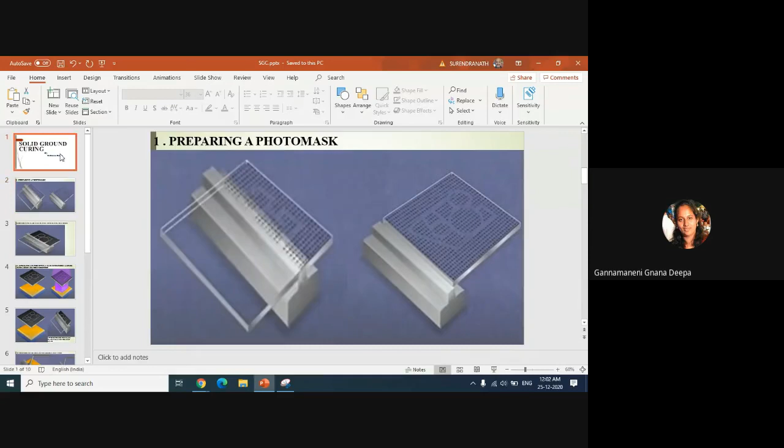Today I am here to teach you solid ground curing. It is one of the additive manufacturing processes. This is a liquid based additive manufacturing process. It is also a rapid prototyping technology. As we know, additive manufacturing has other names, called freeform fabrication and rapid prototyping. If we talk about the technology we are using in additive manufacturing, it is 3D printing technology. So these are the names.

So now we are discussing solid ground curing. It is a photopolymerization based additive technology. This is one of the processes in liquid based additive manufacturing systems, which was in our first unit. In this technology, we have only two printers available: Solider 4600 and Solider 5600. These two printers are the only printers available under SGC.

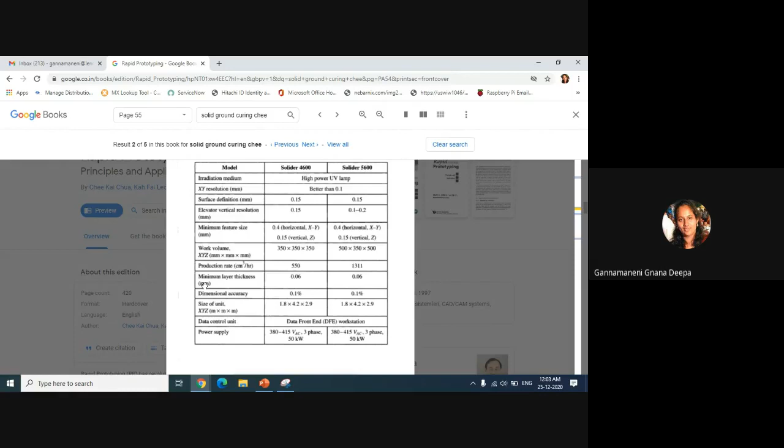This technology was introduced by Cubital Incorporated Limited, Israel. This process was introduced in 1987, and it is a photopolymerization based technology. So, what is solid ground curing? Solid ground curing consists of a print bed and a platform, an ultraviolet lamp for curing, a liquid photopolymerizable resin, and a wax material that acts as a support material.

As we know, in layering technology, a CAD design is created, and that CAD design is saved in a .stl file format, standard tessellation language, and that .stl file is imported into slicing software. This slicing software slices the 3D model into 2D patterns. The slicing software communicates with the 3D printer, and the first sliced 2D pattern is printed.

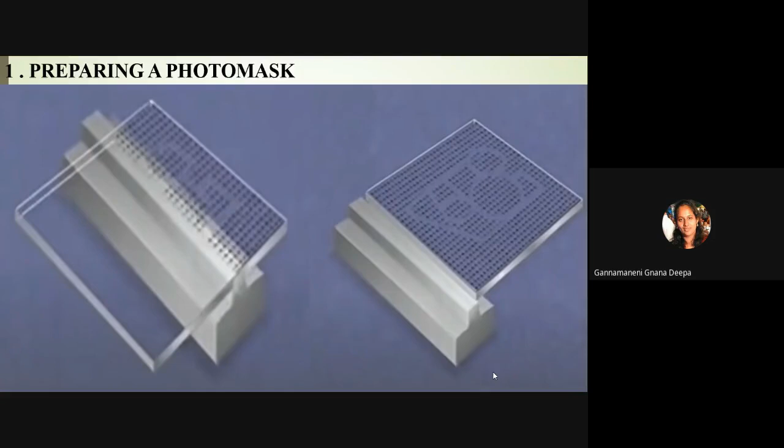This glass plate is passed under the toner. This toner equally distributes the dots, uncovering the contoured area. Here we can see the contoured area. That contoured area itself is our 2D pattern that is sliced in the slicing software. This is how the photo mask is prepared.

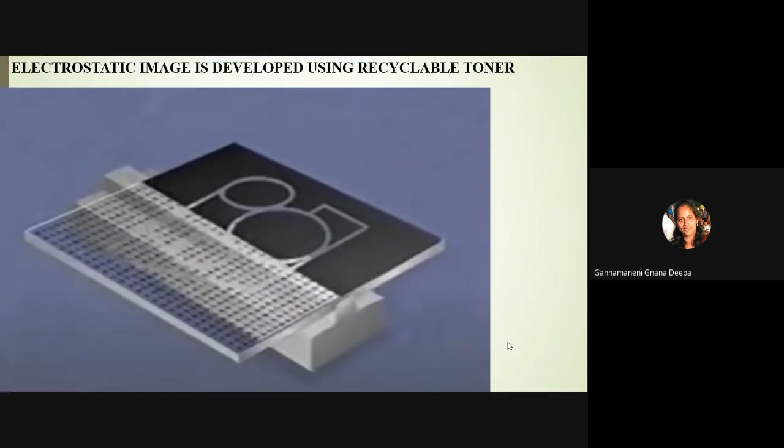Because opaque material is equally covered over there and the contour shape is clear and transparent, the UV rays pass through the contoured area towards the resin only. Everything beyond that contoured area will remain as liquid resin. When the UV light comes in contact with the liquid resin through the contoured area, only that area will get solidified. The entire remaining masked area will remain as a liquid.

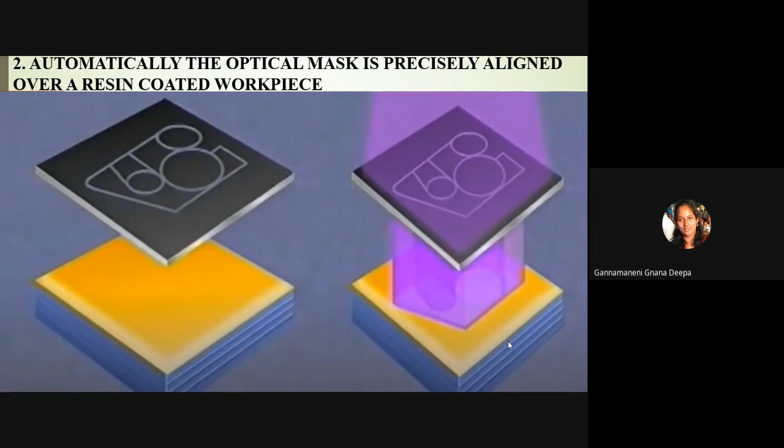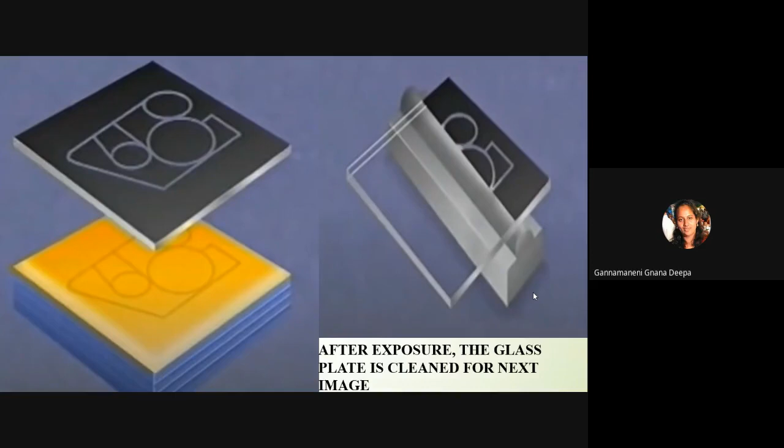Before going to the next step, after the exposure, the glass plate is cleaned for the next image. Here in the slide, we can see that process. For the next process, the workpiece moves beneath the aerodynamic wiper, which we call the vacuumification process. The workpiece with the unsolidified and solidified resin moves under the aerodynamic wiper.

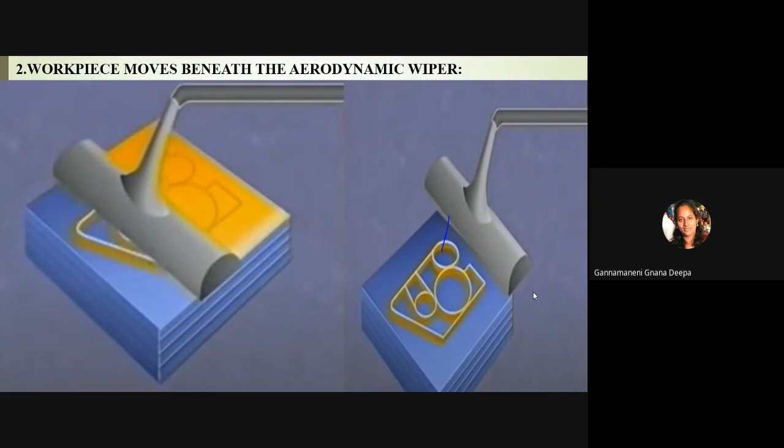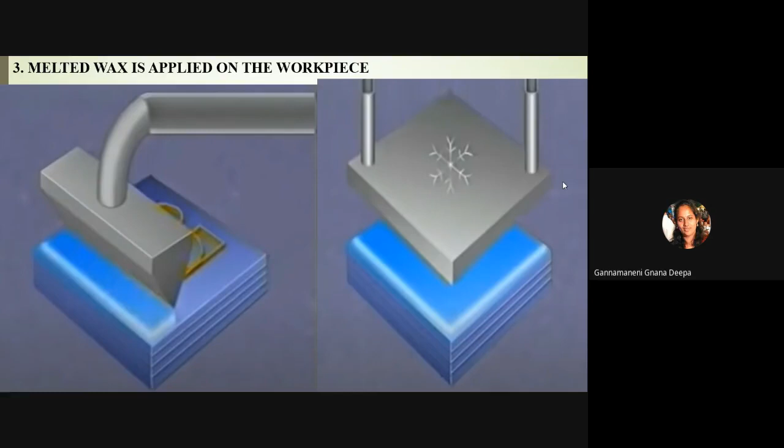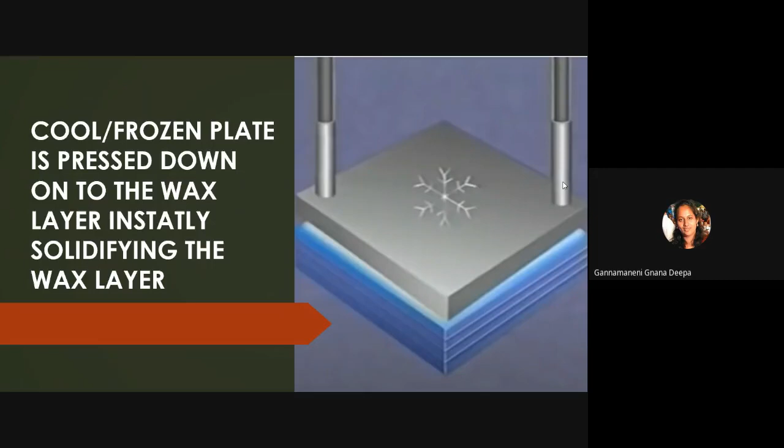When this cool plate is aligned above the melted wax, it instantly solidifies the wax layer. After the solidification of the wax, the entire workpiece with solidified resin and solidified wax is milled with a milling tool. The milling tool has blades on it. It flattens the surface until the required flatness is achieved. We have to do the surface finishing using this milling tool.